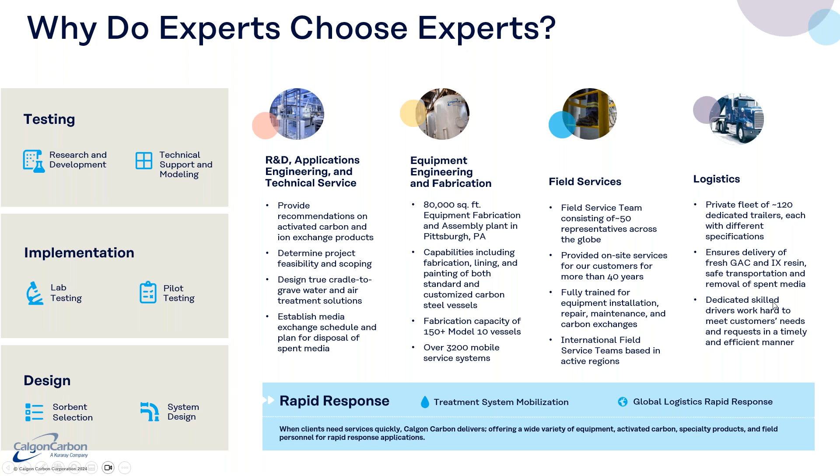So next, just a brief, we call it Carbon 101 to give some context to the type of adsorptive media that we're discussing today. So activated carbon is a crude form of graphite. So if you think of graphite, like the lead in your pencil, those graphitic plates slide perfectly against each other, which allows that pencil to write. Carbon is disjointed, imperfect graphite, so it is locked in place. It's not going to slide off like pencil lead graphite, but you think of it in terms of these layers of graphitic plates.

So we often hear about pore structure, pore volume, pore size with respect to adsorptive media, and that is a valid term to use, but pictorially, it's actually these plates that allow the contaminants to adsorb between the layers of graphite, and the space between those plates dictates the energy of that pore site. So the farther apart, the lower the energy, the closer together, the higher the energy, and different contaminants require different pore energy to adsorb onto the carbon.

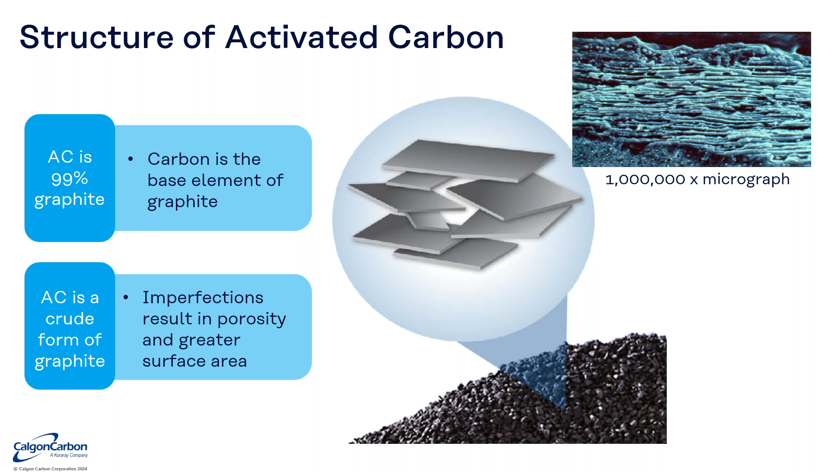Different raw materials produce different types of activated carbon. The most common raw materials are coconut shell, and it's actually just the very, very hard shell, not the outer husk and not the meat in the middle, but there's a thin layer of very hard shell that's used for activated carbon. Bituminous coal, lignite type coal, and then wood. Calgon Carbon offers wood, bituminous coal, and coconut products, and all of our US manufactured activated carbon is from bituminous coal.

Those raw materials produce products with different characteristics, both from physical property standpoint and from adsorptive properties. The ash impurities are different, the density and hardness is different, the ratio of adsorptive pores to transport pores, so that pore size distribution is very different. So just something to keep in mind when you're looking at activated carbon products.

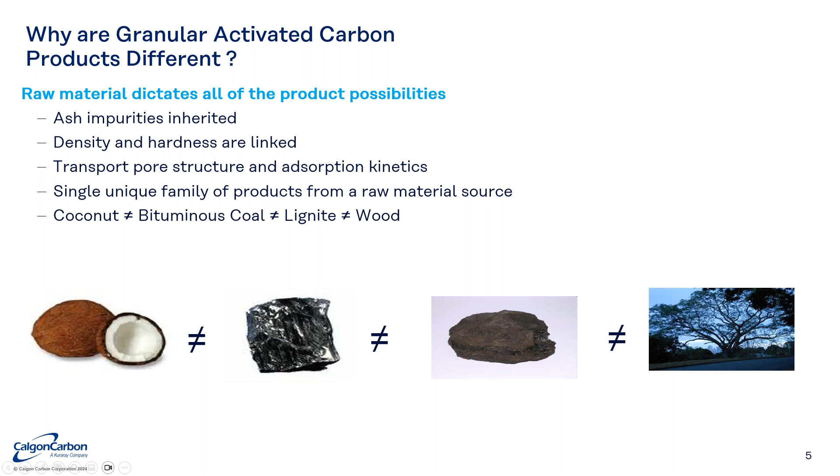And this is a visual of the graphitic plate representation for those different products. Coconut has the tightest pore structure, the hardest composition. Wood has the most open pore structure and is the softest in terms of physical properties. And bituminous coal allows for kind of a balanced, open enough pore structure to allow contaminants to get in, but tight enough in certain areas to hold on to a high amount of contaminant.

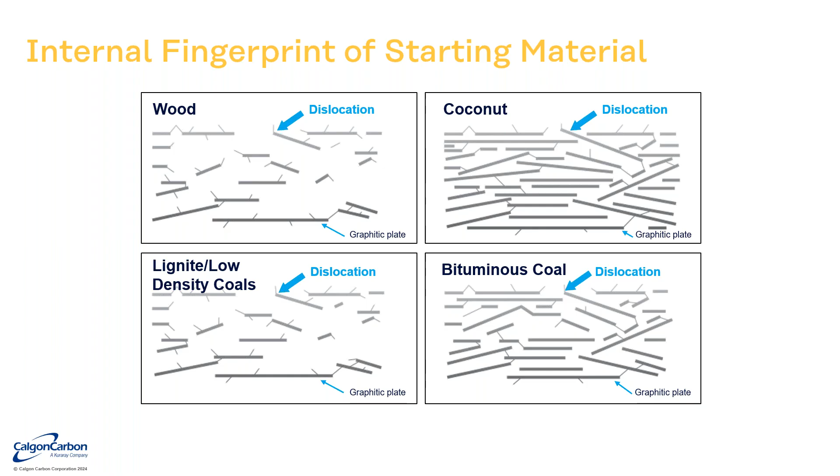And now we'll start the discussion on PFAS. So Calgon Carbon's been treating for PFAS removal for over 20 years. We're effectively able to achieve with our equipment and carbon product solutions non-detect levels down to the current MCL part per trillion level requirements. We have over 150 full-scale installations for PFAS removal across the United States at this point. So used in drinking water, industrial wastewater, remediation, point of entry type systems.

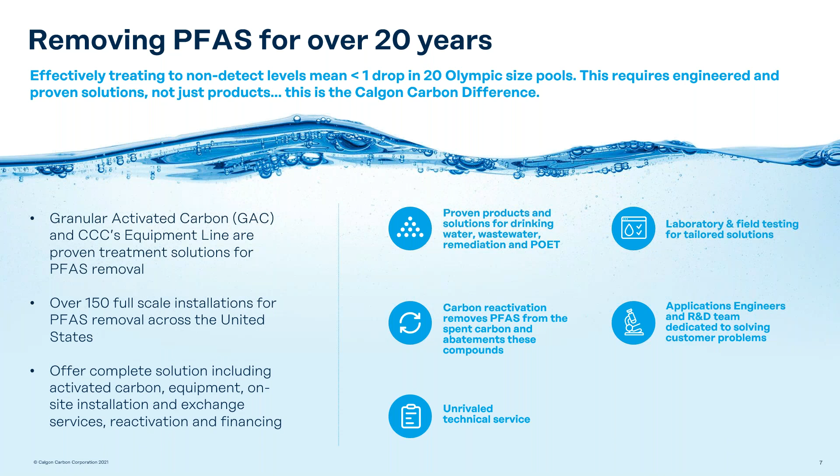We have laboratory and field testing to be able to run scale down simulations of our activated carbon systems to predict performance and demonstrate efficacy. With our reactivation portion of that, where the carbon is removed from the application, the vessel, and returned to us for thermal reactivation, it's the complete solution relative to closing the loop of where the PFAS goes and what happens to it after removing it from the environment.

This is a demonstration for treating lab scale versus our full scale installation. So lab scale on the left is showing bed volumes treated versus our PFAS concentration for 6 common PFAS compounds, C4, C6, C8, so PFOA, PFOS, PFHxA, PFHxS, PFBA, and PFBS.

On the right is our full-scale Model 10 system, which is a 10-foot diameter vessel with 20,000 pounds of granular activated carbon, operated with 10 minutes of contact time. And you can see our lead vessel in blue is just starting to show breakthrough of PFOA a little before 300 days of operation, and our lag vessel, which would be the second vessel in series, is non-detect.

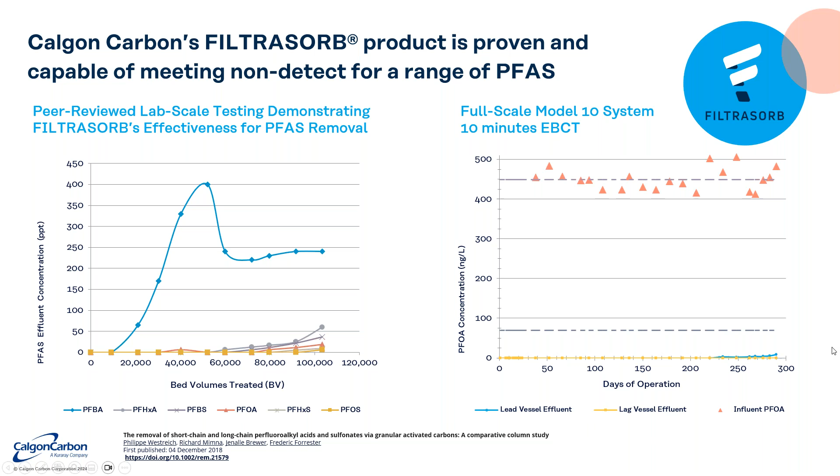The second lab study is demonstrating effectiveness for the current primary drinking water MCLs. So we had starting concentrations for each of these compounds at 200 part per trillion, and our Filtrasorb 400, simulating a vessel with 10 minutes of empty bed contact time, is removing our PFOA and PFOS to below the 4 part per trillion target, GenX below the 10 part per trillion target.

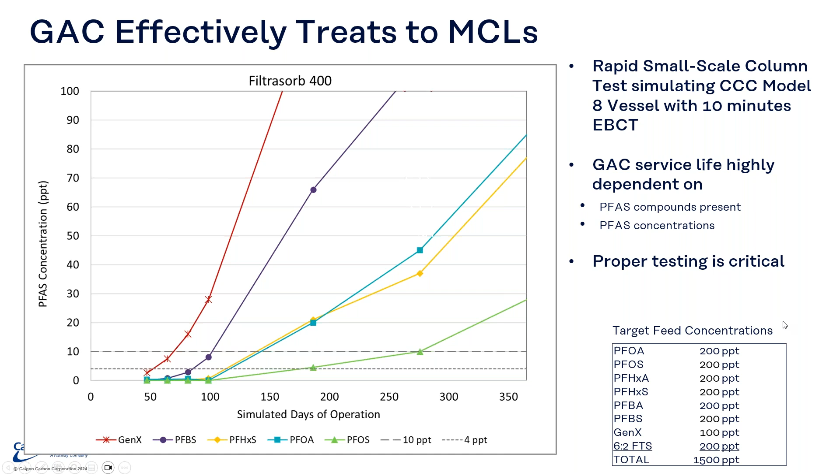And the other important thing to note on this chart is that these compounds do adsorb differently. The shorter chain compounds are more difficult, they break through sooner. So treatment is possible. They certainly are still removed by activated carbon, but there are differences based on the compounds that are present, the concentration of those compounds, and also background TOC. So proper testing, proper design, and interpretation of the test data is very important when you're trying to understand and simulate a full-scale carbon system.

So as water treats a contaminant and the contaminants are adsorbed onto that filtration media, GAC, ion exchange, or an activated clay, clean water is released out of the effluent. But when that media has met its capacity, it's important to understand what the next step is, what happens to the media and what happens to the contaminants that have been adsorbed onto that media.

So with respect to activated carbon, there's a relatively unique solution called reactivation. And reactivation is the thermal process where the carbon is physically removed from the site of treatment, transported back to a reactivation facility that is permitted to handle spent carbon, and then a new reactivated product is produced. And that product can then be utilized in additional wastewater treatment at other sites.

Other types of media, ion exchange or clay-based adsorbents, don't necessarily have this option. It requires either incineration or landfill, often more costly than reactivation.

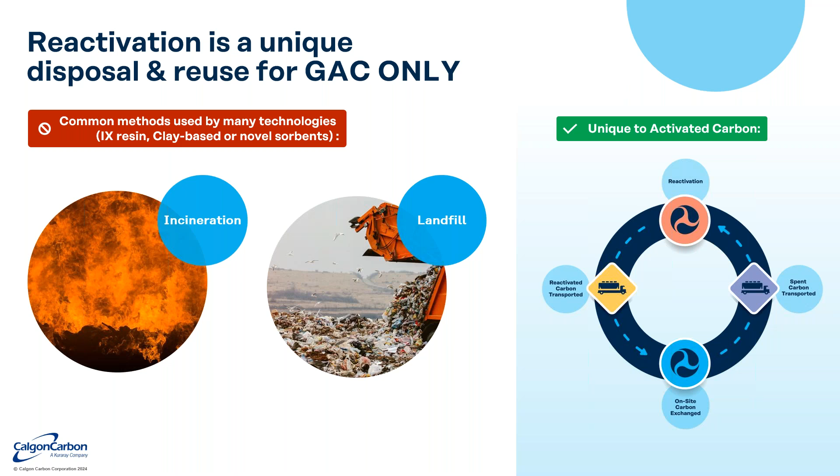So at this point, with the reactivation process, we're able to provide a certificate of destruction that the adsorbed materials have been handled appropriately within permit limits, and both CERCLA and RCRA facilities for processing of those types of carbon are available. There are no landfill liabilities associated with reactivation of spent carbon. Relative to the production of virgin carbon, there's an 80% reduction in CO2 emissions.

So this is a sustainable process that allows us to utilize activated carbon most effectively and to continue to recycle until that carbon can no longer be used. In general, reactivation is lower cost relative to incineration. And carbon reactivation was recently recognized by EPA as a disposal method for PFAS-laden activated carbon. So there's interim guidance for destruction and disposal of PFAS waste or PFAS-containing sorbent materials, and reactivation is specifically cited within that document.

Also, in July 2023, the Department of Defense had previously issued a moratorium on incineration of PFAS-laden waste products. In general, that did not apply to activated carbon because we are under a different CFR, Code of Federal Regulations, compared to waste incinerators, but it did cause a good bit of confusion at the time. So it was important to note that in that memo, it was specifically stated that reactivation of PFAS-containing GAC was an option for handling PFAS-contaminated or PFAS-laden spent carbon.

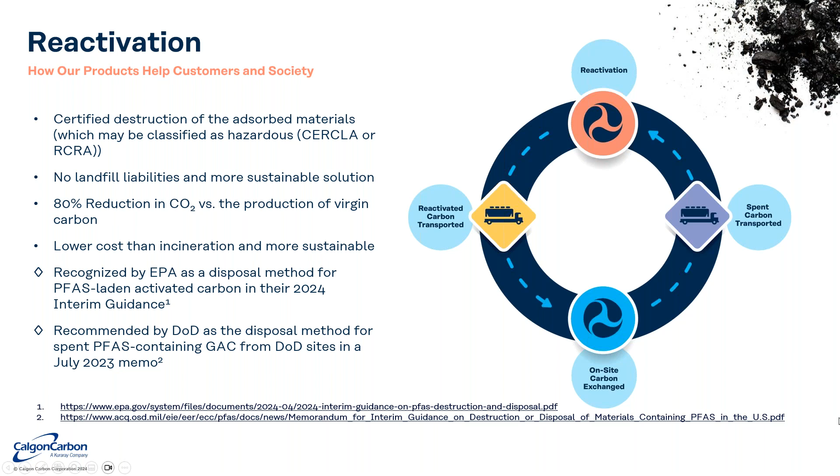In terms of reactivation sites and capabilities, Calgon Carbon operates 5 sites in the US. 2 are RCRA facilities, 3 are potable, and of those 5, 4 of them are also CERCLA approved. There are 2 sites in the United Kingdom. We have the world's largest reactivation site in Belgium, and then also 2 sites in Europe. Millions and millions of pounds of activated carbon are reactivated every year, and over 30 years of experience with these processes globally.

The top of the furnace is at the lowest temperature, and that's where any water is driven off of the carbon. From there, the temperature starts to increase on that first hearth, where thermal devolatilization and desorption can occur of very lightly adsorbed, low molecular weight compounds. At higher temperature, there's pyrolysis and calcination chemistry happening. And then as we reach the higher temperatures, 800 to 1000 degrees C, in the presence of water or steam, a gasification reaction occurs where the carbon is actually activated similarly to conditions of producing virgin activated carbon.

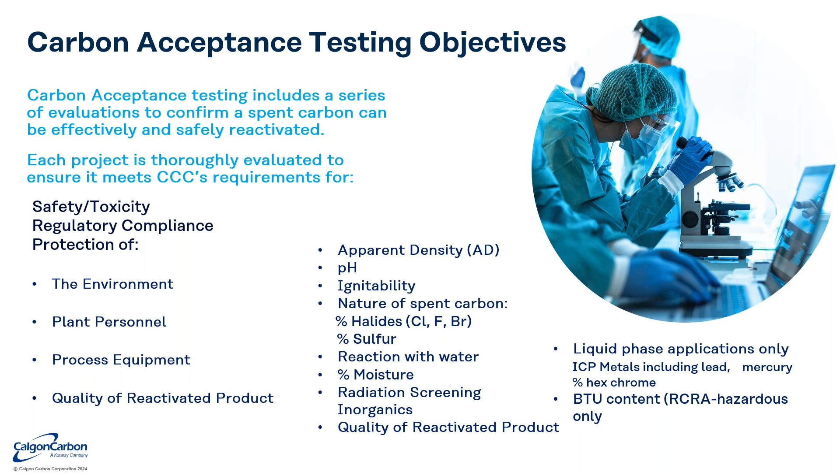So just a bit more on incineration and regeneration relative to thermal reactivation. So the United States CFR defines an incinerator as any enclosed device that uses controlled flame combustion and neither meets the criteria for classification as a boiler, sludge dryer, or carbon regeneration unit, nor is listed as an industrial furnace or meets the definition of infrared incinerator or plasma arc incinerator. So from that definition of incinerator, carbon regeneration unit, which is confusing because we would say reactivation as opposed to regeneration, it is classified differently.

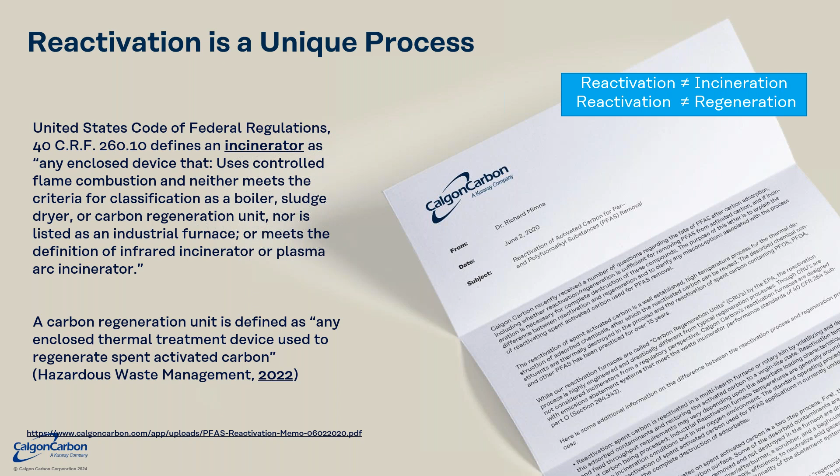So a carbon regeneration unit, reactivation in Calgon Carbon terms, is defined as any enclosed thermal treatment device used to regenerate spent activated carbon, from Hazardous Waste Management 2022. So from those definitions, it is classified different from incineration. It's a different chemistry happening within the thermal treatment device. And again, there are different objectives between those two systems.

So from Calgon Carbon's perspective, regeneration is defined differently. When we're speaking of regeneration, it refers to a process that's typically done in process on the site. The carbon is not removed from the vessel, and either changes in temperature, pressure, or addition of chemicals shift the equilibrium so that the adsorptive properties are changed, so that maybe you're adsorbing under conditions that allow for the highest capacity, and then you change the operating parameters to desorb a certain portion of the adsorbed contaminant or the working capacity of that carbon, and then you continue that process in perpetuity, basically.

And the effect of that is you start with your virgin carbon, you load its capacity, then you implement your regeneration step. That regeneration step is typically at lower temperature or at a shift in conditions that is still going to leave some of that contaminant on the spent carbon. So you're basically not removing it fully, you're just utilizing the difference between the regenerated capacity and the spent capacity to recover whatever contaminant is being adsorbed.

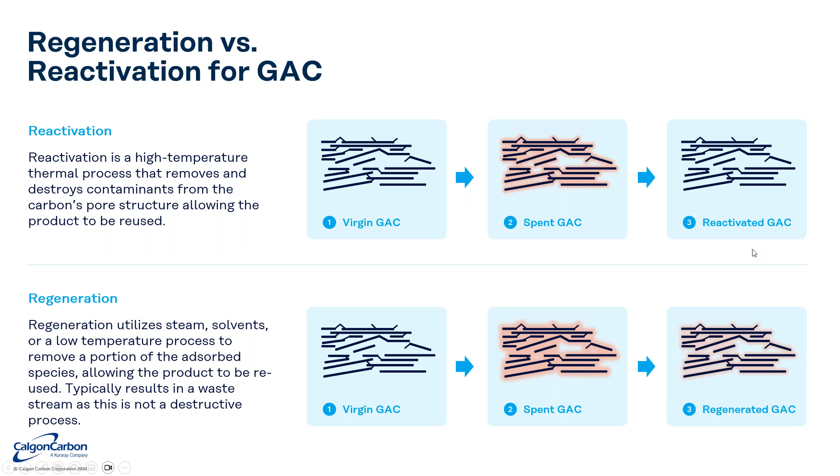So again, the in-process steps can be solvent recovery system, where you're actually trying to conserve and reuse solvent on site, or things of that nature. Reactivation, the objective is to operate at a high enough temperature where you are desorbing fully and returning that carbon to a virgin-like state. So contaminants are either removed or charred in place and transformed from their adsorbed state, so that you get a high quality and extremely clean reactivated carbon at the end. So the temperature range and the operating conditions are drastically different between reactivation and regeneration.

And I think here we will pause for the poll question. Okay, let's see if I can get this to work here. Let's see.

Okay. Here is a true or false. Carbon thermal reactivation is a completely different process than incineration or carbon regeneration. So please vote, everybody.

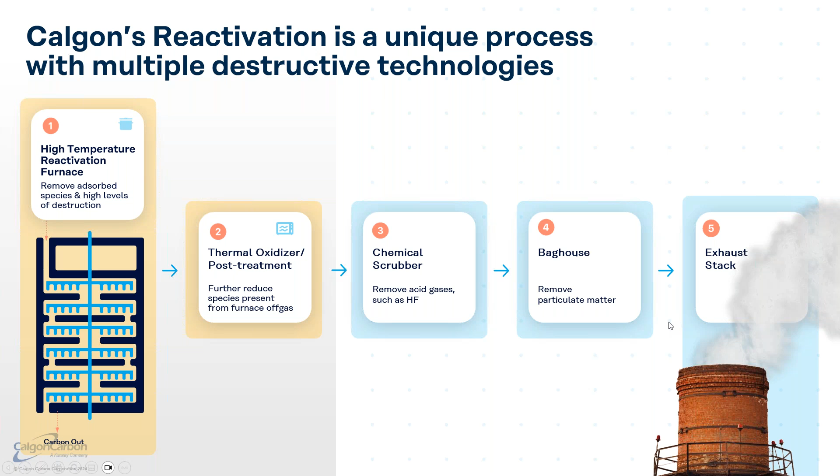So to conduct this study, we used the best commercially available analytical for PFAS testing. We had to look at solid, liquid, and vapor phase analyses. We have samples of spent carbon and reactivated carbon. The spent carbon is really the defined input to the system, so your destruction calculation is based on what that feed rate is. And then in vapor phase, we utilized OTM 45 at the furnace outlet, so between the furnace and thermal oxidizer, and then at the stack. We also tested the bag house or abatement dust by solid extraction for PFAS, and liquid analysis of our cooling water.

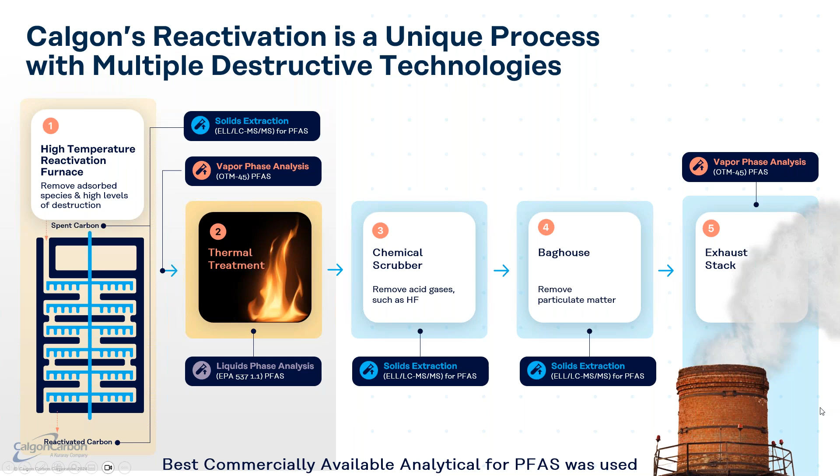The results of this study, so the study was conducted in 2021. The results were published open access in the Remediation Journal in 2022. So those are available for anyone to review the details. So I'll just now give kind of the highlights.

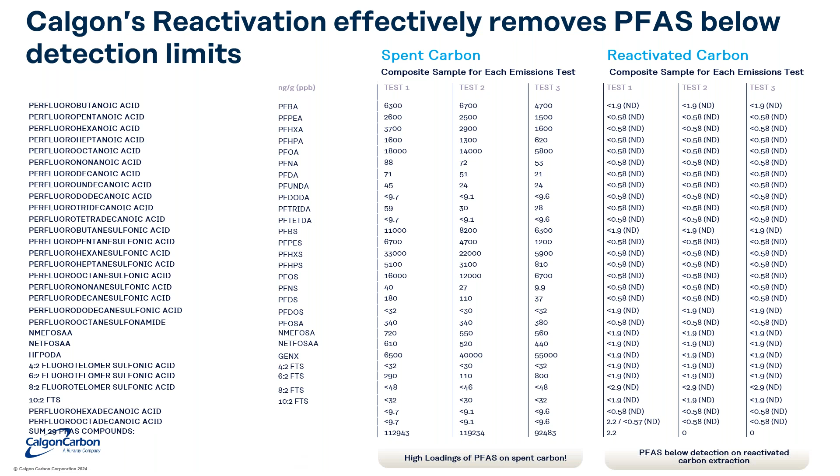Looking at our spent carbon and our reactivated carbon, the quantity of PFAS that was extracted and analyzed, significantly different. So this is in nanogram per gram, which is part per billion. And you can see we're at right around 100,000 part per billion on the spent carbon, and we're non-detect on the reactivated carbon. So demonstrating that those PFAS compounds are removed from the reactivated carbon during the process. We did have one hit of a perfluorooctadecanoic acid. We retested, and then that also came back non-detect. Obviously, I think anyone familiar with these types of tests is familiar with the challenges of these very, very low detection limits. But this data is showing that even at these extremely high feed loading values, we're able to achieve removal from the reactivated carbon.

Looking at the vapor phase relative to the solid phase. So taking those compounds, 29 compounds on the spent carbon that were analyzed, 36 compounds in the furnace off gas. There was really nothing in any other input or output, the cooling water, the abatement dust, that impacted these numbers and was detected. So we have about 0.75 pound per hour PFAS coming in on our spent carbon in the system. Our furnace off gas was 8.4 times 10 to the minus 5 pound per hour for a total destruction removal efficiency through the furnace of 99.989. We saw additional removal through the thermal oxidizer for a final value of 4.88 times 10 to the minus 5 and an overall DRE of 99.993.

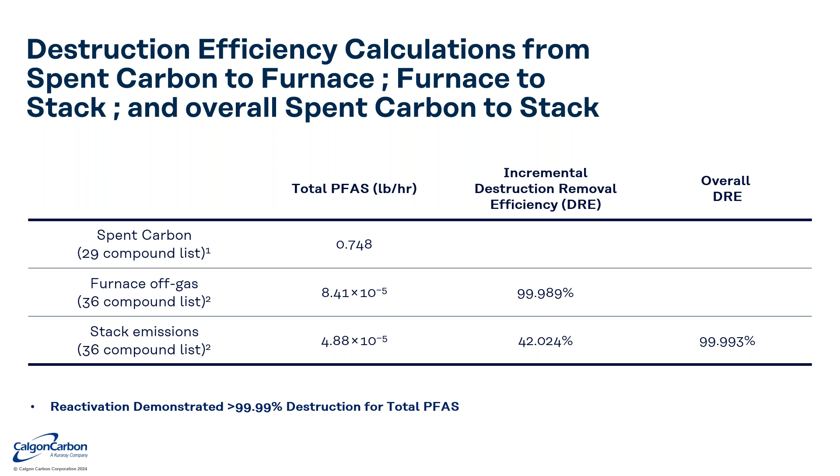So we're able to demonstrate destruction and removal efficiency for these targeted compounds at greater than 99.99, with the majority of that destruction occurring in the reactivation furnace under those unique reactivation conditions I mentioned, and then polishing occurring in the thermal oxidizer.

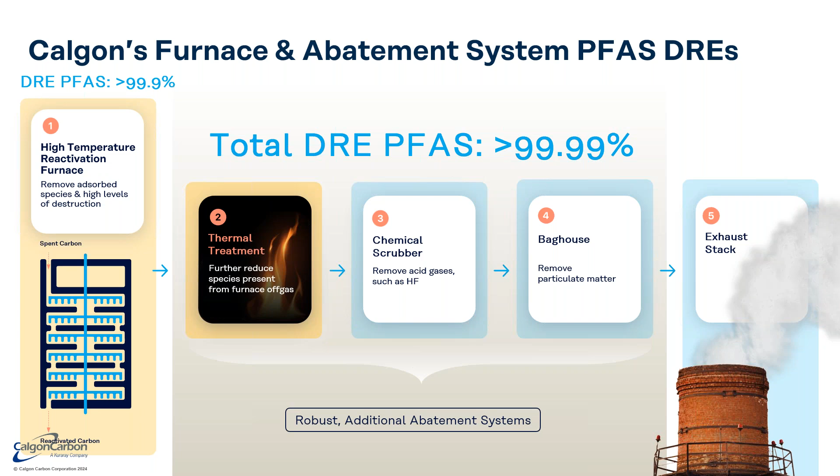Finally, one of the major challenges, I'll say, for the industry or anybody working on PFAS destruction at this point is fluoride measurement and attempting to close the fluoride mass balance. This is obviously just a challenging field in general, given the reactivity of any hydrogen fluoride that is produced, and also detection limits for total fluoride on solid samples in vapor phase. Really, if you achieve non-detect somewhere based on that detection limit, it might not actually be very informative because you still can detect part per trillion PFAS.

But in looking at our values, we are able to detect some total fluoride as measured from the spent carbon, within the reactivated carbon and abatement dust, and within our furnace off gas. And our fluoride mass balance was able to close to about 61%, with the majority likely being very reactive within that furnace lining, the process equipment, and anticipated low recovery from those abatement dust and potentially the vapor phase analyses. But again, as methods improve, detection limits improve, it is important to define and attempt to close that mass balance as much as possible.

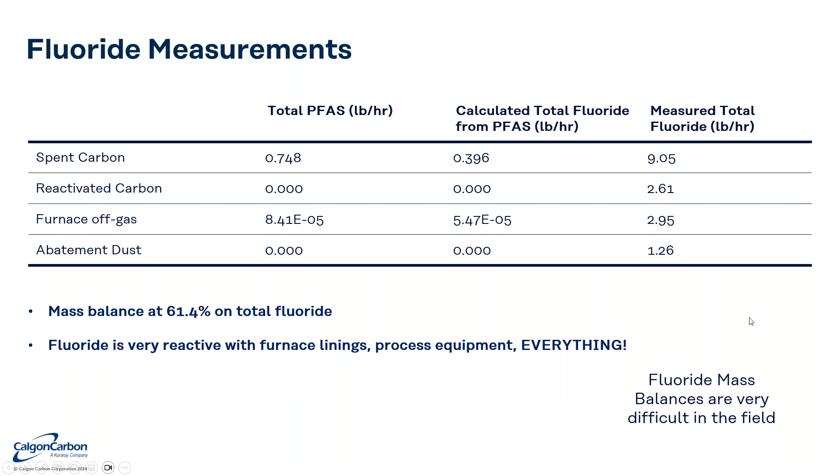So finally, our conclusions and key findings. Calgon's reactivation process is a unique process that thermally removes PFAS and achieves high destruction in the reactivation furnace through a robust abatement system. Reactivation is very different compared to incineration or regeneration. Our proprietary process was able to achieve greater than 99.99% destruction for the targeted PFAS measured. High level of hydrogen fluoride detected supports mineralization of these compounds as the source of the fluoride in the HF measurement.

And reactivation is well established, fully commercialized, safe, simple, and effective technology for removing PFAS from the environment. In addition, it's a sustainable process that allows for recycling of activated carbon and has 80% reduction in CO2 emissions relative to virgin carbon production.

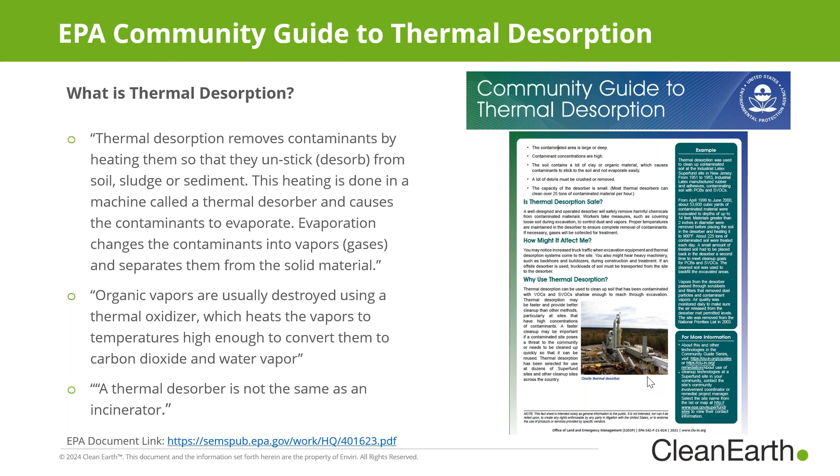The second difference is the feedstocks going into these systems are relatively low in concentration compared to what could potentially be fed to an incinerator. Where an incinerator could feed AFFF just as a liquid into it, we cannot treat 3% contaminant loads in these particular technologies. They're not designed for that. Most of the time we're talking about parts per million concentrations of various different compounds, could be double or triple digits depending on what the contaminant is. So, two big differences there: one, the beneficial reuse of the soil post-treatment, and two, the mass of contaminant that's actually fed to the systems.

A little bit of a process flow diagram itself. Just pull up a pointer here quick. So in a thermal desorption system, there's really only one process unit that actually does the soil treatment, and that is the rotary dryer or rotary kiln, where the soil is fed into it, exposed to that high temperature, tumbled or rotated through the system, and then discharged and cooled, and you end up with a pile of treated media. All the rest of the technology is really to help control the process airstream.

The outlet airstream from the rotary goes through a cyclone to remove any sort of dust, so that we're then oxidizing a relatively clean airstream. Post-oxidation, that airstream is cooled through an evaporative cooling chamber, which uses an air over water system to generate a very fine mist. The steam generated from the heat being added to that mist water cools the airstream down so it can be finally filtered via a baghouse particulate system. Then the clean gases exit out through the stack.

The technical paper, this T125 document, was produced by ASTEC Industries. Some of you may be familiar with ASTEC from their design and build. You see their name on quite a few asphalt plants, but in the past they have also built thermal desorption units themselves. So, oh, sorry.

Research projects. Clean Earth, as was mentioned, in 2018 partnered with New York State Department of Environmental Conservation and completed a test on some PFAS contaminated soil identified within the state. You'll see here a little bit on the soil data itself. It was 22 tons of soil. Important point to note, because our systems can process on average around 35 tons per hour. So the amount of soil put through the process was relatively small and did not allow for any real additional science beyond our base premise. It also did not allow us to complete any emissions testing on the unit during this particular operation.

The source of the soil was an asparagus farm. They were taking in soil composted organic matter. That composted media was actually the sludge associated with a secondary paper fiber facility within the area, and that's where the PFAS was being moved to the soil from. Just a little bit there on what PFAS was in the soils itself.

On the permit criteria, at the time New York State had a clean fill criteria. Their criteria for PFOA and PFOS was 72 parts per billion as an additive of the compounds, and the soil SPLP had to be less than 10 parts per trillion. If you met that, it would be clean fill, and that was the criteria set for us to have a successful research project.

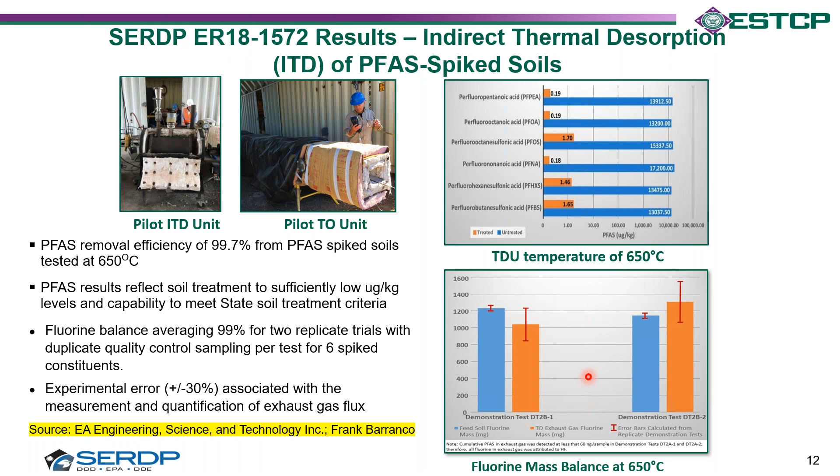Testing is going to include OTM 45, OTM 50, OTM 55, and other testing criteria to help demonstrate if there is any sort of chance of developing a mass balance in relation to HF and fluorine. This is actually built off of a SERDP project that was completed by EA Engineering in partnership with a company by the name of TDX, where they indirectly heated PFAS spiked soils and ran it through a thermal oxidation system post. Just showing some general results here of what they had found from their totals in relation to soils, and then demonstration testing on the stack, and some relative experimental errors associated with them working to generate their fluorine balance methods.

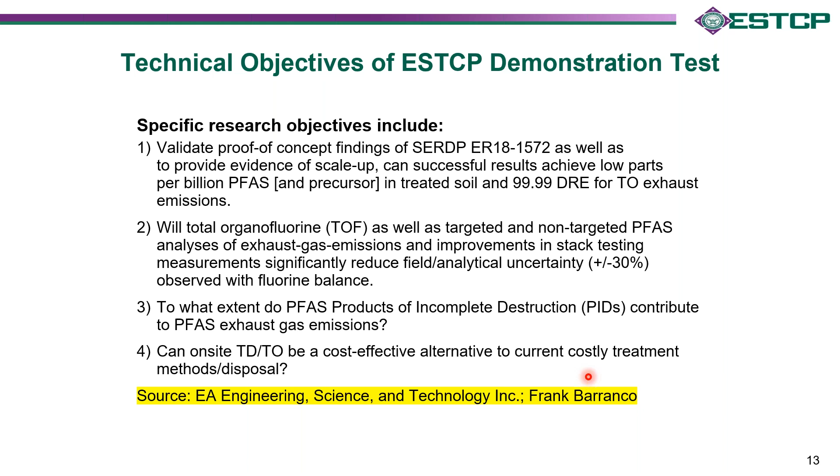So just to review a little bit what the ESTCP project demonstration test is going to be: again, looking to demonstrate 99.99% DRE related with the off-gassing emissions, looking at total organic fluorines and trying to determine whether or not they could close up their mass balance gap, which they had from their SERDP project, looking at products of incomplete destruction or combustion, depending on what tech you like to discuss. And then, is it a cost-effective technology in relation to other disposal methods out there?

And I'll pause quickly for our poll question. Yes, and I also realized after you started, I forgot, there's one I should have done before you started talking. We'll do that at the end, I guess. But here, yeah, I forgot.

Here's the question. When evaporated contaminants from thermal desorption are destroyed in a thermal oxidizer, are they converted to CO2 and water? Please select one, yes or no.

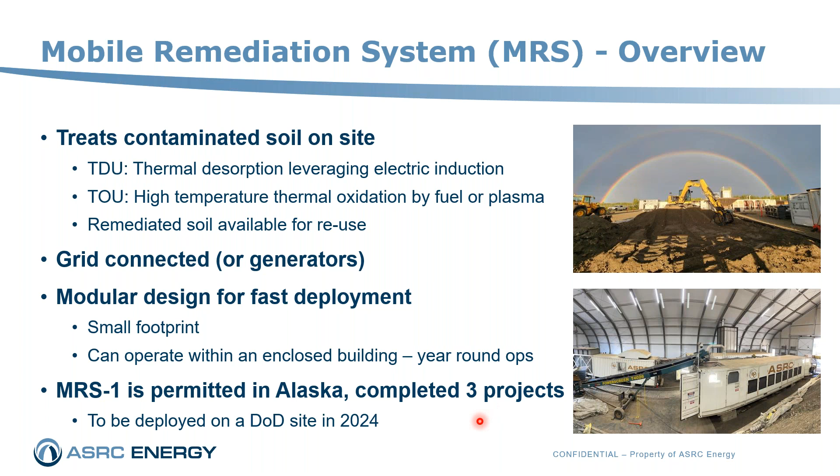So they have completed 3 projects, and they are also working on a DoD ESTCP project this summer, where they are treating some contaminated soils, and they're also going through the stack testing protocols, which I had mentioned a little bit earlier in relation to the tech. Some of the results that they've seen to date, in relation to PFAS compounds in the soils, they're generally getting to non-detect treatment levels, somewhere around the 0.2 part per billion range in relation to 537 methodology, which they're presently using.

A little bit on the HAP side, or the HF emissions that they're analyzing through their testing process. They're generating very little, about 0.003 tons per year, which is a far cry from what is allowed in relation to the federal HAP numbers. And then through the technology, they don't generate any secondary waste streams. The waste streams that come out of thermal desorption are the treated soil, solid media, and then the effluent gases themselves. But again, a little bit of difference in the technology.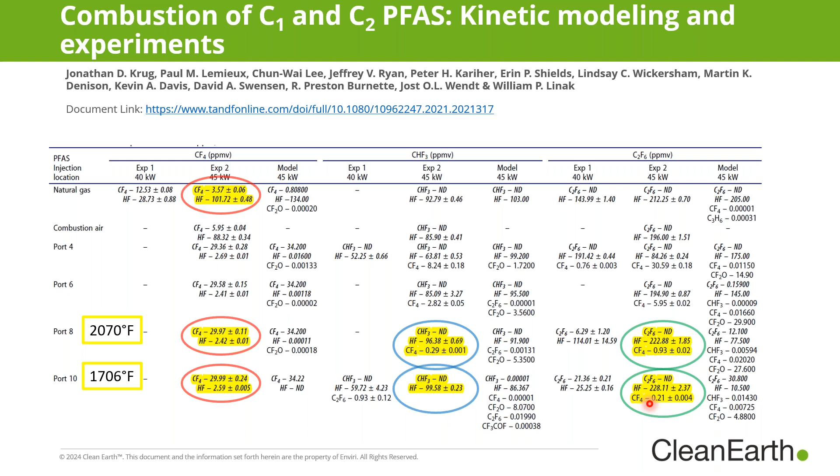So you'll see here with CHF3 that there is actually no CF4 that was generated. And if you're looking at C2F6, which in the document they say may be a suitable surrogate in relation to PFAS compounds itself, there is actually less CF4 generated. So at lower temperatures, you're getting higher HF conversion and you're getting lower PIC generation itself. So just something for thought process.

Also, work which came out of Triangle Park: low temperature thermal treatment of gas phase with calcium oxide, and actually presenting another next slide here as well. But one of the things that they had done is they had taken and lined a furnace reactor with calcium oxide and then had placed and run PFAS-laden airstreams through them. And one of the findings is that they could actually lower the oxidation temperature of the PFAS compounds when they were in the presence of calcium oxide.

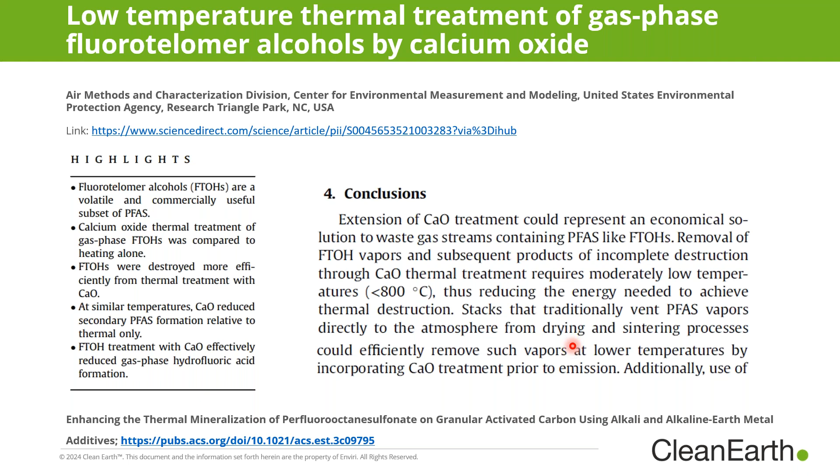So obviously full scale, this sort of technology needs to be further evaluated and analyzed, but it actually presents some promise for the fact that there are additives to gas streams or even potential systems such as ours that could help reduce the oxidation temperatures, which would make the systems more efficient and make it a little more reasonable to manage.

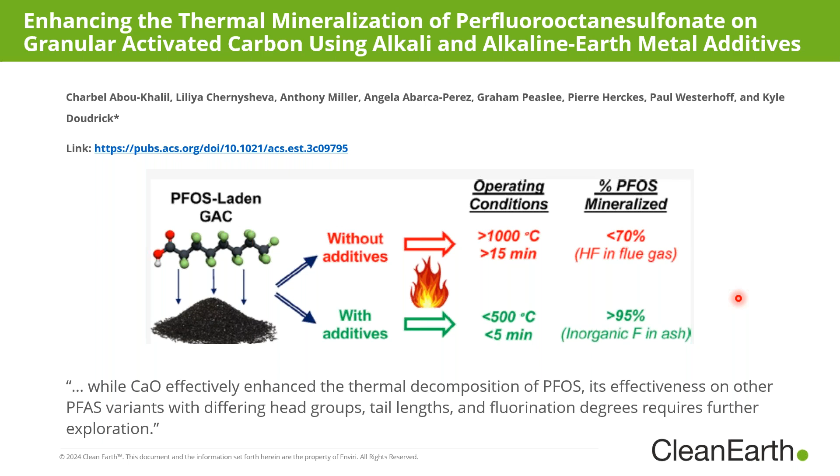Additional work that was done along the same lines actually had come out of Notre Dame University, where they took PFAS-laden GAC, with and without additives, as you see here in the picture, and exposed them to relatively high temperatures to determine what sort of PFAS mineralization they would receive. And with additives, which was a calcium oxide product again, they were able to demonstrate that they could get a much higher mineralization rate than they could without the addition of the product itself. So demonstrating that there is further potential for the enhancement of the oxidation process with the utilization of an additive such as calcium oxide.

So not only has it been shown that potentially having excess water vapor in the process, generating some free radicals, also helps to decrease thermal oxidation temperatures, but also the addition of calcium oxide is being shown to help in the particular process.

So additional references and sources for thermal desorption, for anyone interested: the Interstate Technology Regulatory Council has generated several documents which talk about specific thermal desorption project types and how they should be regulated. That information's out there on their website. CLU-IN, the Federal Remediation Technologies Roundtable, and then obviously the Clean Earth website has some information in relation to the technology itself.